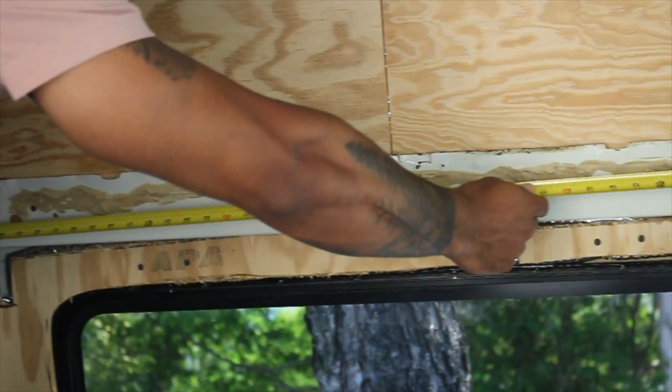So what I'm gonna do first is get the measurement for the total width of the whole thing. It looks like it's going to be about 47 inches for me, and I'm going to start drawing it out on here, kind of.

So this is going to be the width. It doesn't have to look good, and I'm going to write 47, and I go like this, and you can kind of see that's going to be the bottom of this thing, or the width of the whole thing.

Then the height is where it's going to be confusing, so I'm actually going to draw it because it's going to be a weird shape. It's going to be kind of like this, that's what the height of this is going to be. It's not just an easy measurement.

So what I'm going to do is go down at each point, like maybe at the beginning of it, it's going to be 13 inches. So I'm going to write 13 right here.

And then I'm going to do the middle and the end too. This one is also 13, so it actually stays straight up until a certain point, and I'm gonna measure that point. So it's about from this line over to here, staying straight for about 18 inches.

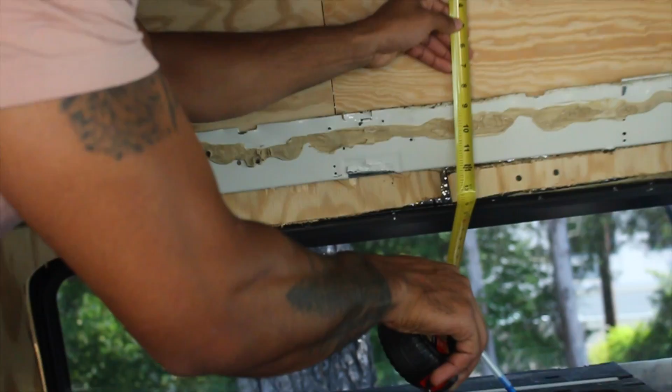This is the part where it gets real bad. So 13, 12, 10 and a half. It's gonna end up being about 8.5 inches.

So what you could do is just mark the end at 8.5, and then kind of draw at an angle what this line is going to be. And then I actually want this cabinet to come out about 10 inches, maybe, so I'm going to say the depth is 10 inches.

Now that we did all that, I'm going to show you guys how to take this into a 3-dimensional actual drawing of the cabinet that we're going to put up here. Now that we got the measurements done, these are rough, okay? They're gonna get more exact when we get on this computer.

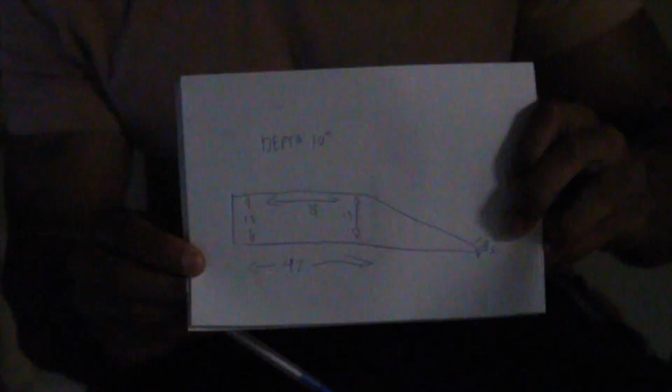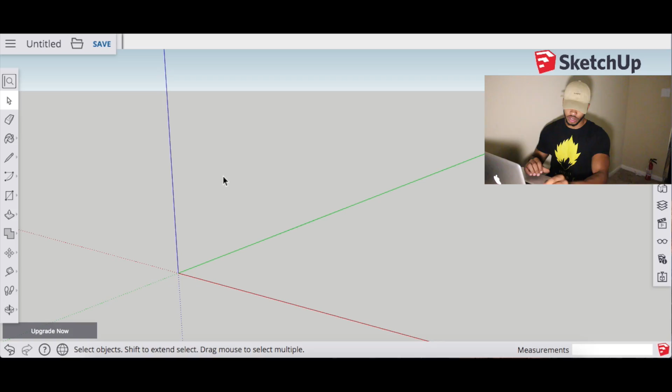So in order to make this picture that we drew earlier, what we need to do is basically draw this box on the screen and then extrude it to the depth that it's supposed to be. The easiest way I found to do that is to use the measuring tool, measure it all out, then use the pencil tool and draw on top of the measurements. Let me show you what I'm talking about.

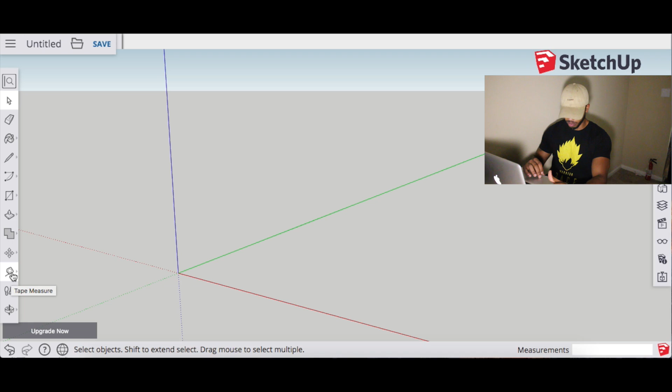Over here on the left hand side, this is all the tools in the system, and at the bottom you see this thing that looks like a tape measure, and that's because it is a tape measure. We're going to click on this and make sure you're using this one at the top. These do some other things, I'll show you what that does later. I usually only use these two.

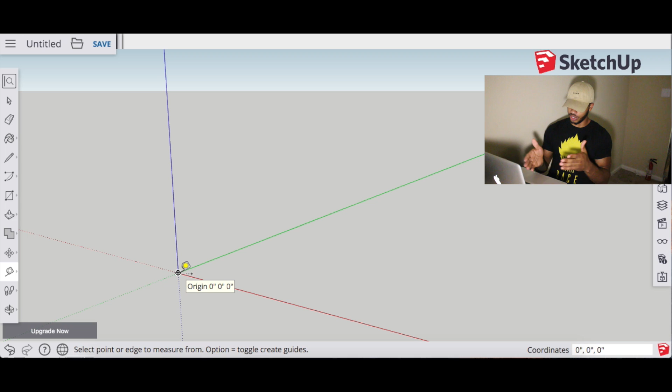Once you get the top, I know this is confusing, but these angled lines right here, this is really just giving you a point to start. It's called an origin point. It has coordinates on it. You don't necessarily need that, but I usually use that for my first starting line every time, just so I know where to find it on the screen.

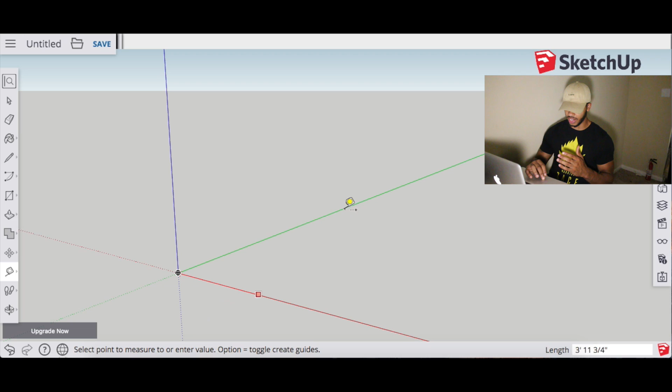So what you're going to do is come down to this corner and then click, and that starts the measurement. Now you can go in any direction with this. So the overall width of this whole thing is 47 inches that I'm making. What I'm going to do is go along one of these lines that are already here, and make it go 47 inches.

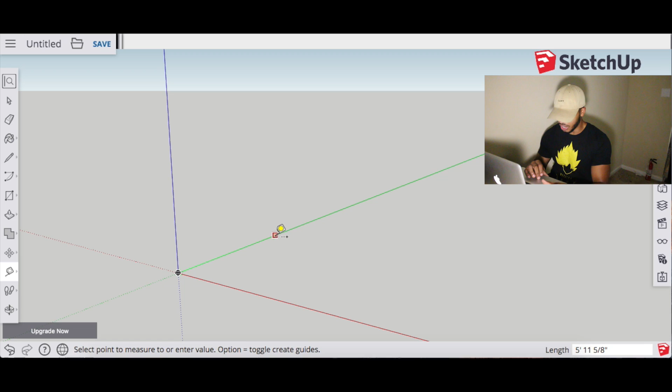I'm going to make mine on this green line. The way you do that is you go along that green line, but you don't click again, you just start typing 47. If you notice in the bottom right corner of the screen, you're going to see this, it says 47 - whatever number I type here is going to come up, and that's the number of inches I'm putting in.

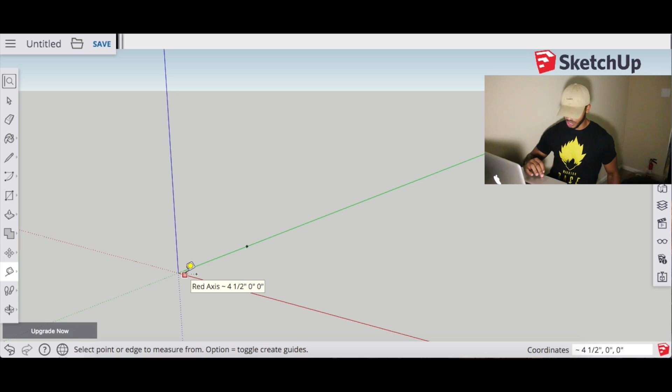So I'm typing in 47, then I'm going to press enter. You see that I've made a point here, and this is the second point over here. What I'm going to do is draw this first line, then come across 20 inches, draw this line and connect the dots. I'm going to come back to my origin point, drag up, and type in 13 because that's what this height is supposed to be. Now you notice my dot showed up down there.

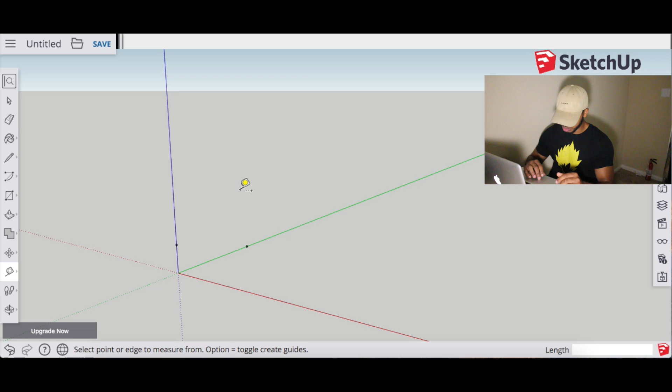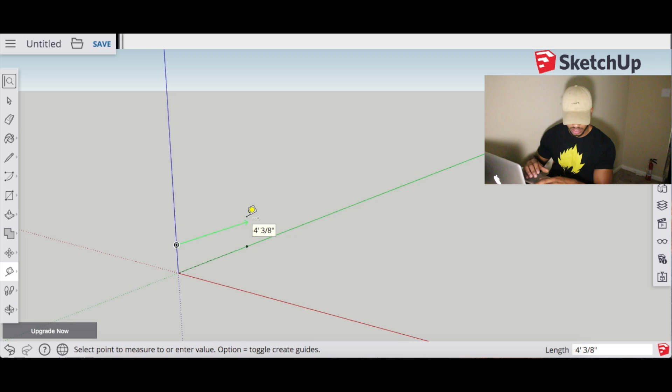Then I'm going to grab that 13 point, and here's something about SketchUp: if I'm going along this green line that's here, when I'm dragging my mouse and the line turns from black to green, that means I'm parallel with this line, and that's what I want. So once I'm parallel to that line, I'm going to type in 20. So now that's 20 inches, good.

So now I'm going to come back to this point, and I'm going to come up 8.5 inches, because this was the weird shape.

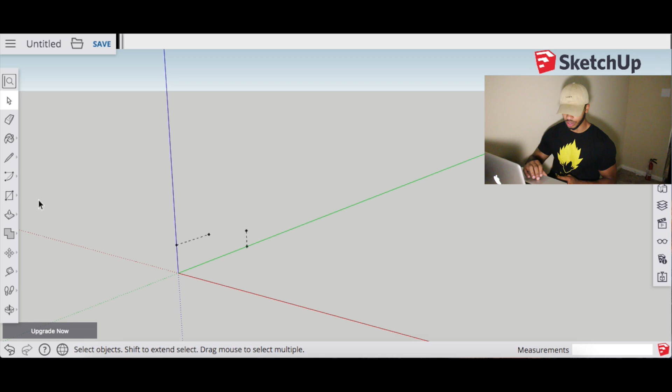So now that I have that set up, what I'm going to do is grab my pencil tool and draw all of that in. I'm just going to go to my origin point, go to this point, this one, back down, and across. Now that we got this whole thing drawn out, what you're going to notice is that the center of this drawing just turned blue.

And basically what that means is that it's like one group. You completed the loop of the drawing, if that makes sense.

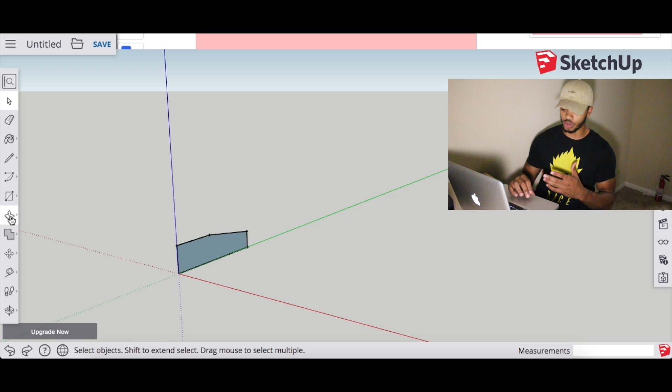So now what you're going to be able to do is come over here to the tools, and you're going to see what's called the push-pull tool, and that just looks like a box. It's this one right here - I don't know why I'm explaining it to you since you're looking at it on the screen. But it's this top one right here. When you open it up, these three options come out.

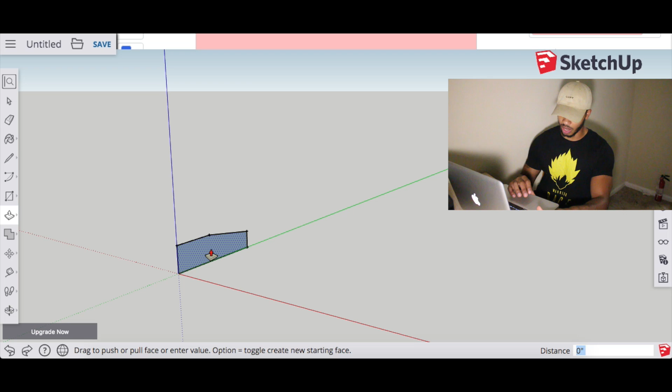It's just this top one, I never use anything else. But what you do is when you click on that group of things you just put together, that little blue part, when you move your mouse it shows that you can make this have depth. You can turn it into a three-dimensional picture.

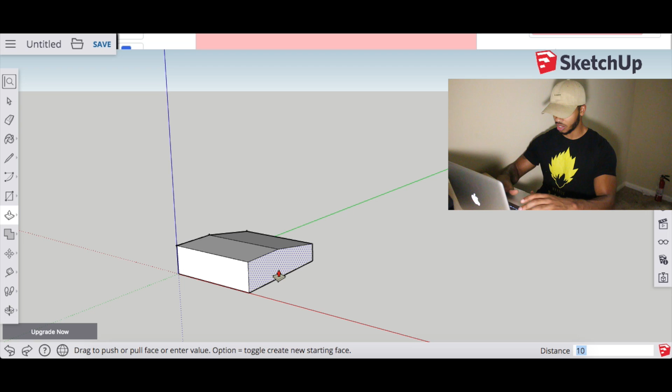So what I'm going to do is the same thing as before. I'm going to drag it out and make this the depth that it's supposed to be, which for this project is 10 inches. So I'm going to type in 10. Boom, there we go.

And now we have a base shape that we are going to use to actually make the piece of furniture that's going to go in that place.

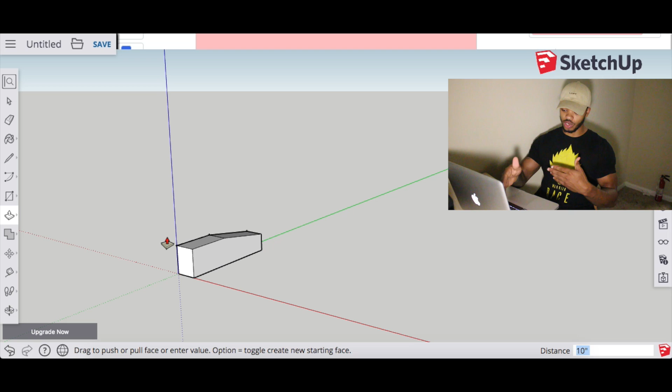So now I need to move closer so we can get a better look at this. The way I'm going to do that is come down to this tool that looks like a circle, it says orbit. I'm going to click on this, and they have a few different options here: zoom in, pan, and orbit.

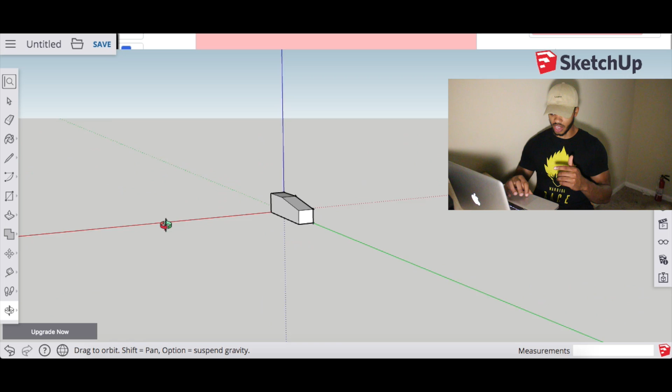So I'm going to use the orbit just to show you, when you click the screen and drag, you can move around your object. Hold shift and it'll immediately go to that hand, which grabs it and moves the whole screen left and right. And then you can zoom in easily by scrolling.

These are the outer dimensions of what everything's going to be. So everything's going to be inside of this, if that makes any sense. And you'll see what I'm talking about right now.

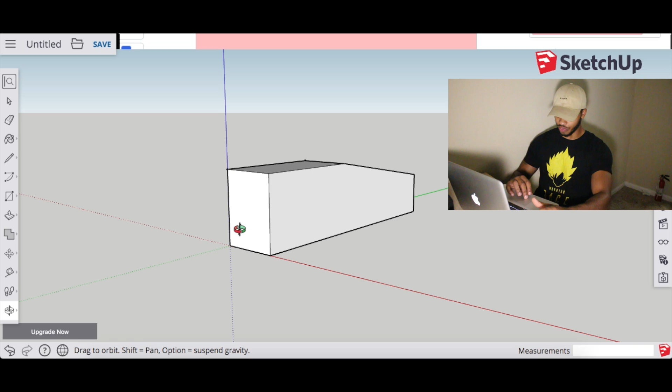So this whole thing, each one of these surfaces is now a different element that we can manipulate, which is good. So what I'm going to do is grab my select tool and click one time on this front face here, and that just selected that face for me.

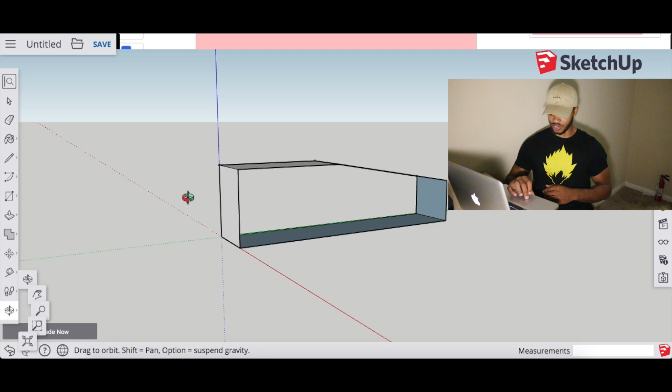So now I'm going to press delete. Now that I pressed delete, I can actually see inside this box. I'm going to delete the front side and the back side of this, so now you can see that I just kind of have a shell.

The wood I'm using to build this piece of furniture with is going to be 1/2 inch plywood and 3/4 inch plywood. All of these pieces that we just drew are not really considered individual pieces, they're all considered like one big piece.

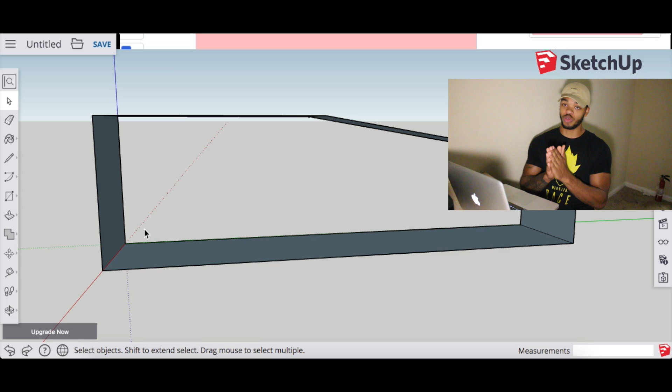So in order to make it individual, so it won't mess you up later, you're gonna click 3 times anywhere on the thing you just made. Click 3 times, 1, 2, 3. And now it just selected every surface, every line, every corner, everything.

And we're gonna right click on that, and then hit this little option right here that says make component. Once you hit make component, you can give it a name. I'm just gonna call it shell, I guess - I usually don't call it anything, but for the purposes of this video I'm gonna call it shell. Once you have it named, hit OK.

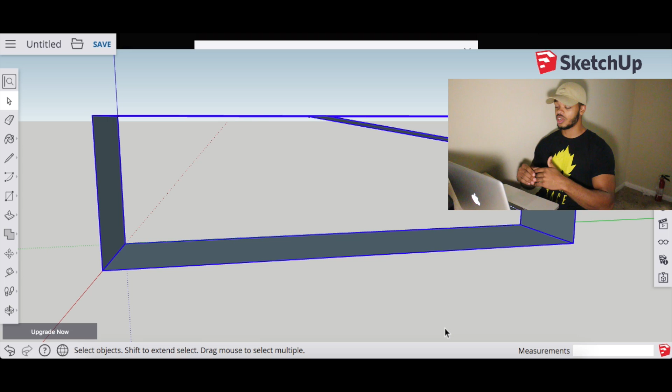Basically what this is gonna do is make this one element. So now when you draw other lines, you can draw stuff on top of this, you can draw stuff touching it, and it won't affect this thing, and this thing won't affect the next things you start drawing on top of it. You see what I'm saying?

So I'm going point to point, I'm going to the back, going to the other back, and in the front. So now what I just did, the reason why I did that, is because I just drew a new surface here. So I'm gonna go to that little push-pull tool.

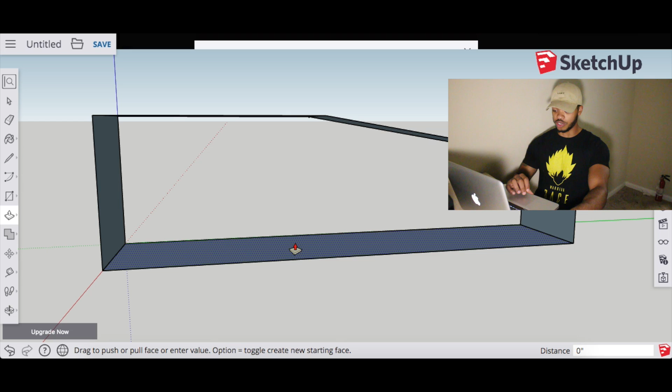I'm gonna click on that new surface I just drew, and this is gonna be a 3/4 inch piece of plywood. So I'm gonna come up and type in 0.75, because that's 3/4 of an inch. Hit enter, and then that's actually an actual piece of wood.

So now I don't want this to be affected by anything else, so I'm gonna triple click on this again, and I'm going to make this a component, and I can call this wood. Sure, we'll call it wood. And then I'll hit OK.

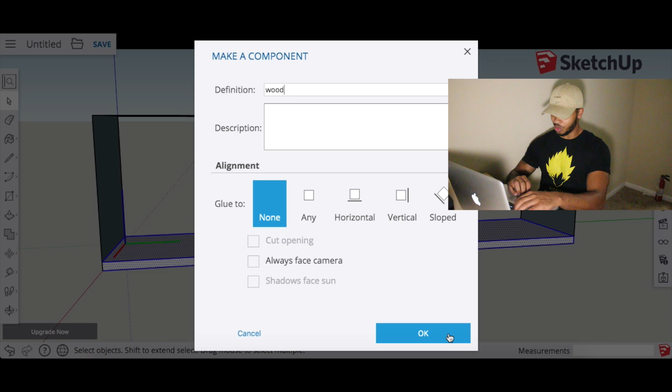And that way when I draw on top of that, same thing, it's not going to affect anything. Even when you click on it, notice how all surfaces, all corners get selected, as it was before I did that on the big thing. When I clicked on one side, it would only select that one side, but now when you click on this, it's a whole package deal now.

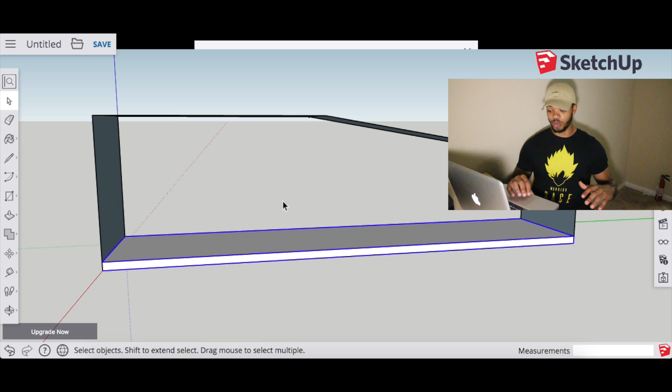I'm actually not going to have a top part on this, that's why I made this shell. It's really just to show me where the ceiling of the van is going to be, and then this is kind of like my limit to how far I can go with it. So I'm going to do the other sides now.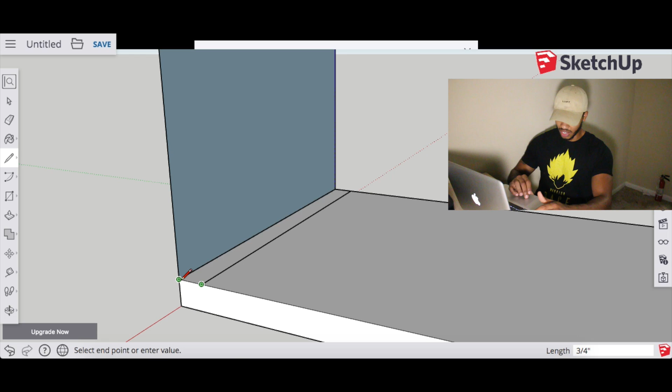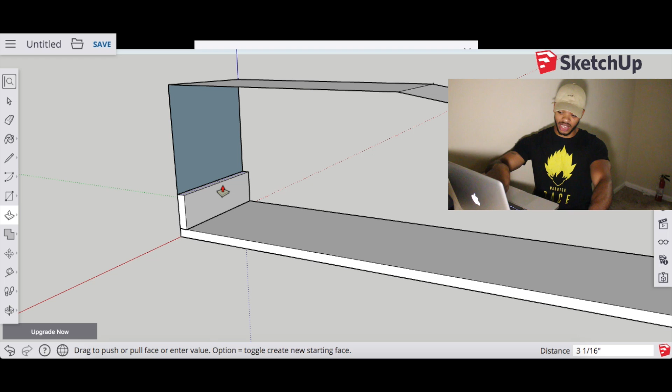Hit that extrude tool. Let me zoom out and show you guys something pretty cool. When you hit the extrude tool, let's say you don't even know how high this height is, because this is now a different height than before, when we were doing the overall height, which we know is 13 inches. Let's say you don't want to do the math to subtract that 3/4 of an inch made by this new piece of wood on the bottom.

All you got to do is use the extrude tool, come up, and you see how on my mouse it shows a little purple square popping up. When you click, that just made it the right height. So you didn't even need to know how high that was, and SketchUp really just did it for you.

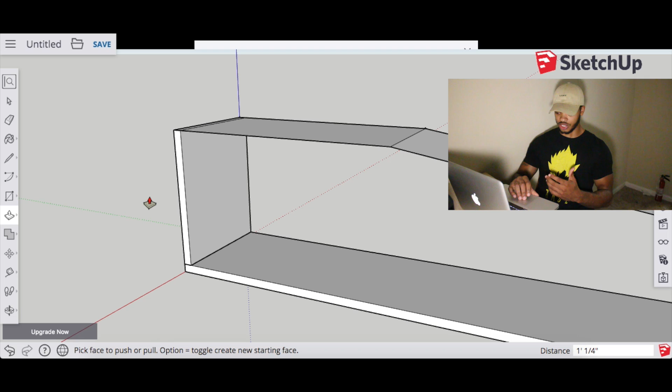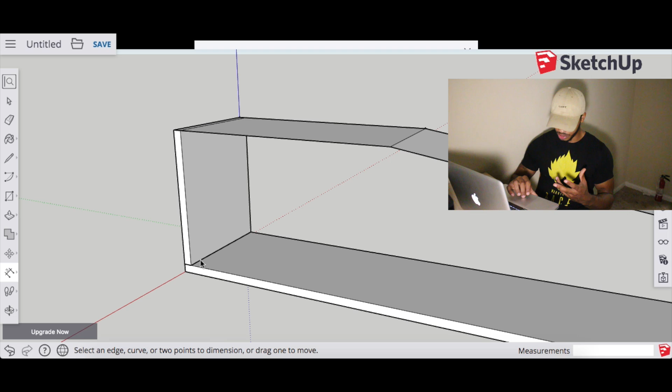So now when I make that a component, I can show you, using the tape measure tool. When you come back to the second one, this is the only other piece of this I use, called dimensions. You click on dimensions, go from this line here to this line here, and you can see that this is 1 foot and 1/4 inches.

Remember, the entire height of this whole thing was 13 inches, 1 foot 1 inch. So now you can kind of see why using SketchUp first before you go build it can be a lot easier.

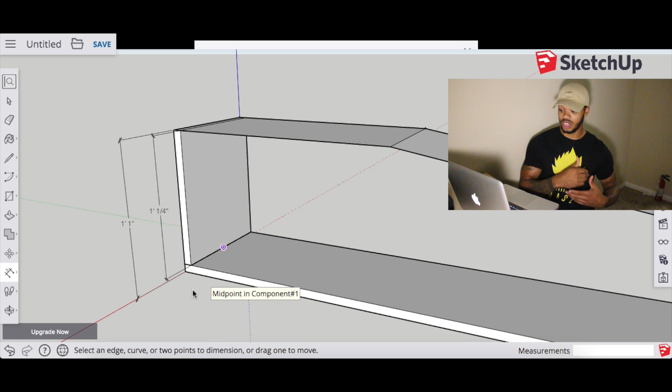Some mistakes I used to make before using programs like this: I would go cut all my wood, think I was completely right, but sometimes I'd use the full height measurement instead of the full height minus the actual pieces of wood making up the bottom, so the piece ends up bigger or smaller than it's supposed to be. But with this, you go into it knowing exactly what to do.

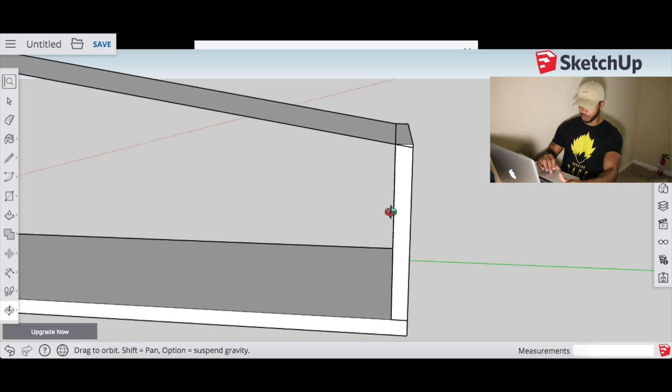This is another good example of how SketchUp is going to help me a lot later. You can see how, if you're bringing this piece of wood up right here, at a certain point the ceiling is crooked, not straight. Since it's coming down at such an angle, that's actually cutting into the piece of wood I'm trying to install here. So later, while looking at this picture, I'll know I need to cut this piece of wood at an angle, not straight, so that it can fit into this space.

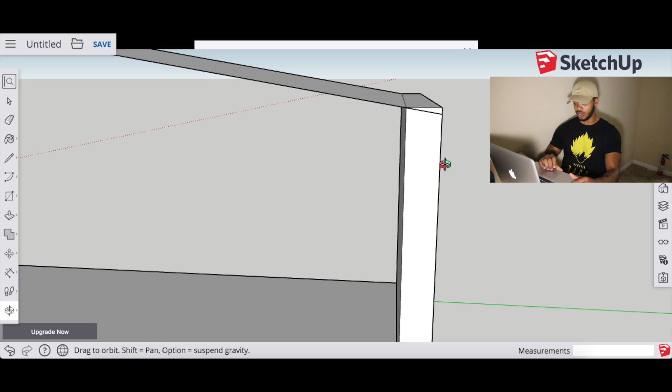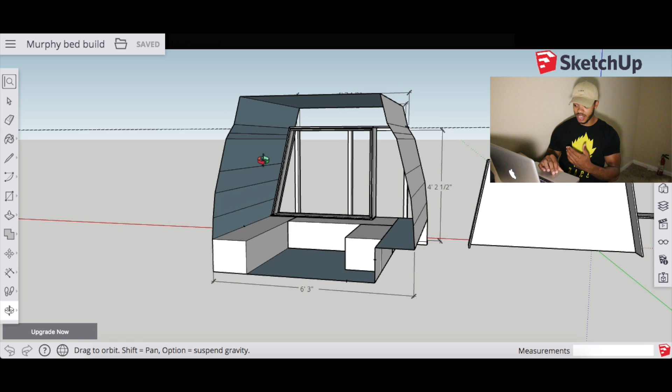This right here might look extremely confusing, but it's not. This here is the actual shape of the van. I measured the back half of the van, not the entire depth of the inside. What I did was measure the width all the way up. You see each one of these lines on the wall here, 1, 2, 3, 4, 5, 6, 7, 8. This represents 8 different points of the width of the van all the way up.

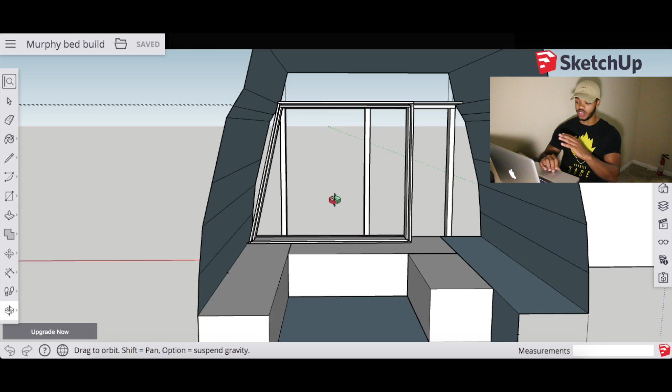The reason I needed to do that was because a van is a vehicle and doesn't shape perfectly square, so I couldn't make a perfect square box and start building on the inside because the van itself isn't perfectly square. As you can see, the bed itself isn't perfectly straight, nothing in here is perfectly straight. So what I did was measure the widths of the van all the way up from the bottom to the top.

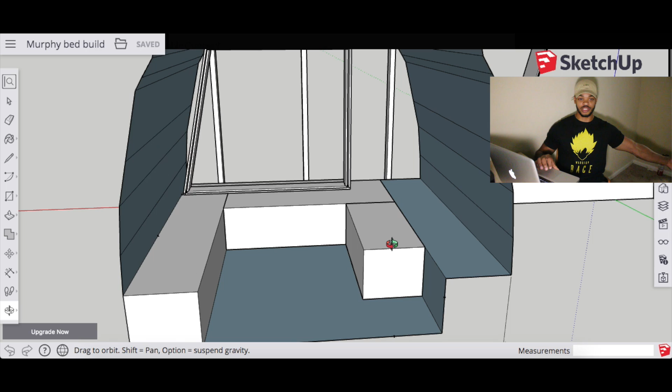Then once I did that, all I had to do was come into SketchUp and draw that shape, go to the push-pull tool, and push it out to the depth I wanted to work with. This is the empty shell of where the benches are now sitting, and this is the empty shell of where the bed is now there.